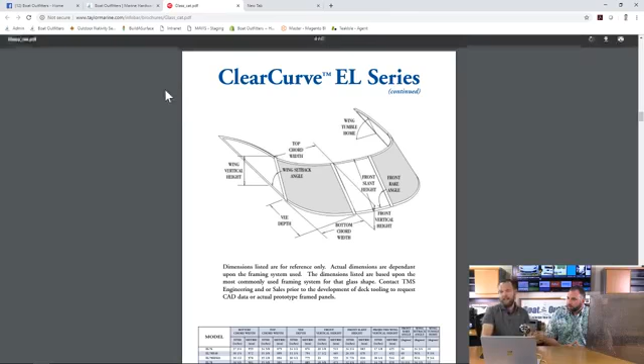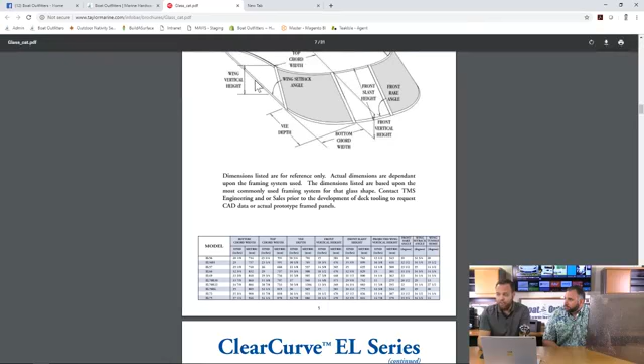Let's actually switch over, and I'll show you. Let's go to Taylor Made. Let's switch over to the screen. What I have here is Taylor Made's catalog, and I'll scroll up to the top. Taylor Made makes most of the OEM windshields for a lot of the boat builders, and my understanding is their customer service department's pretty responsive and able to help you find what you need. They've got a variety of different standard styles here. You can see the different models and the different dimensions.

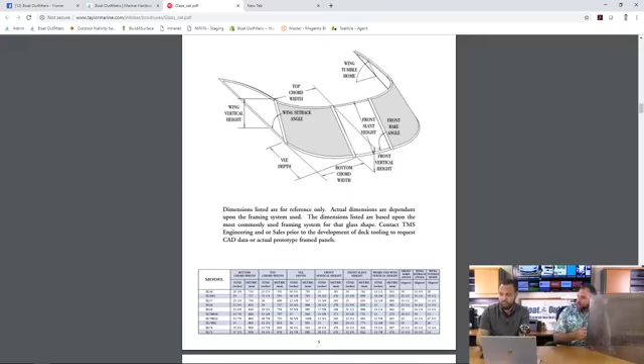Now it's quite complicated. It's still going to be a little bit of a difficult task. Not just the windshield, but a lot of the framework that goes around it as well. Absolutely, so from a damage standpoint, yeah. There's a lot of different windscreens on here. If you have glass, if I had a glass windscreen that broke, this is my first call, Taylor Made, right? So glass, Taylor Made. Acrylic, we can help potentially with acrylic.

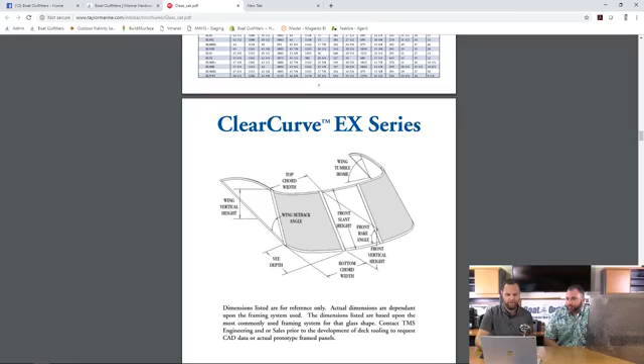So let's pivot, and we'll talk back about specifically acrylic windscreens. So what's the next thing you want to look for if you have an acrylic windscreen? Really, is it damaged or is it missing? Some of the boats, somebody's taken it off and modified it. In my case, if I wasn't able to get this replaced, you see a lot of skiffs out there nowadays where they pop the windshield off and there is no windscreen on the boat whatsoever.

Which is always an option, right? I mean, it's pretty expensive to replace windscreens. In some cases, you might be better off just removing it. In this case, I had the windscreen, and for a number of reasons, I really, over a year and a half, haven't pulled the trigger on getting it done because of the barriers of cost and what it takes to actually build that windscreen.

So I think we can go into that, and one of the options in the end is, sometimes it's so cost prohibitive to do a windscreen that another option may be ordering a new console, and as part of that, having that windscreen on there. But if you don't have a windscreen, really your option is you can't go off of something. So having a custom fabricator come out to bend it around the console that exists, or order a new console, you'll be able to get a windscreen for that console.

But if we want to walk through the process of getting this built - for the person with an acrylic windscreen, my first advice is to try to find where the bending fixture is, the mold per se, is kind of equivalent in that case. So my first call would probably be to your boat builder or dealer, and ask, hey, where did you buy this windscreen? One, do you have it, and can you get it for me? If not, can you tell me what the OEM manufacturer was of this? Because I'm hoping to track down the mold to be able to rebuild it.

So let's show green edge real quick. Let's go back to the Boat Outfitters page and look at the acrylics. I actually have some sitting in front of me here too, I can show you. The green edge is designed to look like glass - you get that green tint that you really only see when looking at it at an angle at the edge. You don't really see it looking through it, versus the pure clear you went with.

I think that's another option too - if you don't fully do the windscreen, I've seen some guys who rebuilt the boat just do this initial front piece. They don't have that swept wraparound look around the entire console, but they're able to get something that keeps the splash off the top of their dash.

So maybe show them some of our cut-to-size stuff that may be an option. You click on the green edge acrylic, and if you don't want this full wraparound to the dash, you're able to order just this piece. Maybe you wanted, what do we say that is, maybe a 28 by 20. You can order just that piece for right around $100.

You can get it polished if you want. So if you just wanted to do a flat panel as opposed to a full bent windscreen, that's certainly an option. My sales manager here is actually on the other side of the camera - have you ever done that before, sold somebody a flat substitute to try to cut costs as far as doing a bent windscreen?

A couple of times, but not often. He's saying a couple of times, but not often. I wonder if more people would take that up if they knew that as an option.

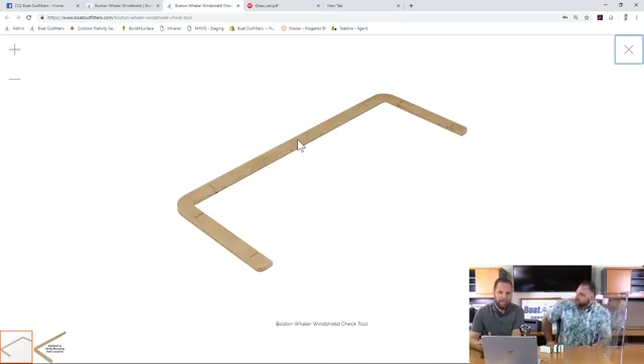This is a good example, to go ahead and take a second and toot our own horn a little bit. This is an example of where, when you work with boat outfitters, we make every effort to try to do everything right up front, and be as transparent as possible.

If you go back to the original windscreen here, you can see these windscreens are not returnable. Well, they're not returnable because we don't have anything to do with them when you return them. We build them to order. We're building them for you.

So you order it and you don't check if it fits, that becomes a little bit of a challenge, and we have to work through that, and no one wants to deal with that.

So we've built this check fixture - let's see, what does it sell for? It's $24, right? We're trying to cover the material and the shipping, so that you can set this up against your console, make sure that the radius fits, see exactly where your holes are in your console to make sure this fits.

If you work with us on a windscreen, as much as we're in many ways trying to discourage that because it's quite expensive, we're always going to go above and beyond to try to get you drawings, communicate expectations as far as lead time, keeping the loop on where we're at. So it's very much something we're open to. It's just something that becomes quite expensive, and we want somebody to be educated on other options before they feel like, hey, this is my only option, and they're quoting telling me it's going to be $1,000 or whatever.

Some of the work we do is with Everglades for their windshields and side windshields, and we sell a fair number of those as well. That's actually a good example of more of a straight flat windscreen. You'll see there's the front windshield for an Everglades 243 and the side windshield. In that case where they're marrying it up against the console itself, that's something we're supplying. We have a couple different options for years, makes, and models.

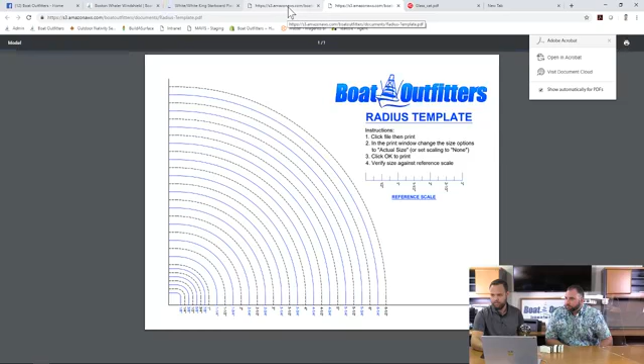I was actually pulling the radius template up - let's pull it up and show you. One second, switching back to my screen. So here's our radius template, showing your different bends. I'd have to print this and overlay it - this one's probably 3/4 inch. But you can get to where there are quite considerable, large radiuses that extend even over a larger area.

For sure, absolutely. What do you got, Matt? I was going to say you can show a larger radius on that piece of acrylic right there. Oh, that's a good example - here, grab this, let me get this out of the way.

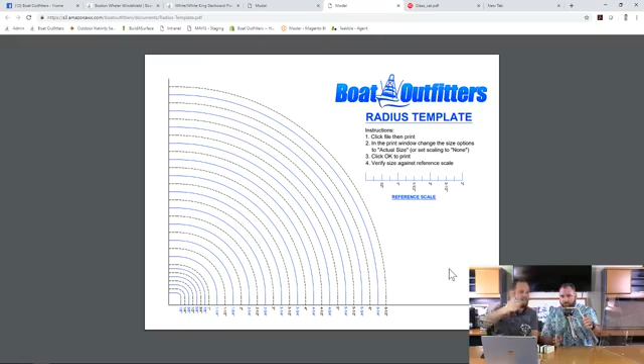Is there any other questions out there, Sarah?

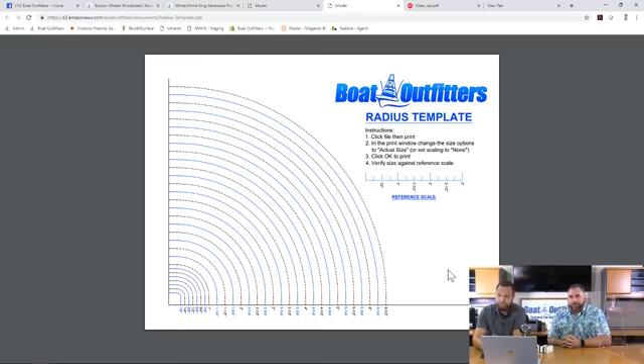Let's switch back. Sorry, wrong button.

So maybe we can show them, from where we're doing a lot of our fixtures, the ones for shower rotary doors or slider doors. Do you want to show a couple of those, same concept? I think the picture you showed earlier downstairs was for a shower rotary door. That one might have been more of something else, there might have been that in the background. You could absolutely be right, let's go to that and see.

Switch back, I think we've got one more question. Sarah? Yeah, Jeff was asking, can you make any shape bend? If not, what options do I have? We can make any shape bend.

Now, we are not a thermoforming company, that's not our specialty. So if you wanted to bend a dome, or a full vacuum-formed bin shape, that's not really our specialty. But if you want any different radius, that is definitely something you could do, up to a certain point. I think once you get into some of the acute angles, you can't go past a certain point. Matt, what's your take on that?

My take is, generally speaking, we can bend it out of a flat piece of material as long as there isn't a vacuum required, and we can make a fixture to recreate it.

So he's saying, in case you can't hear, that in his experience, and he's been here longer than anyone on the customer service side, he's the customer service manager, we've been able to create a fixture and bend just about anything that's ever been requested.